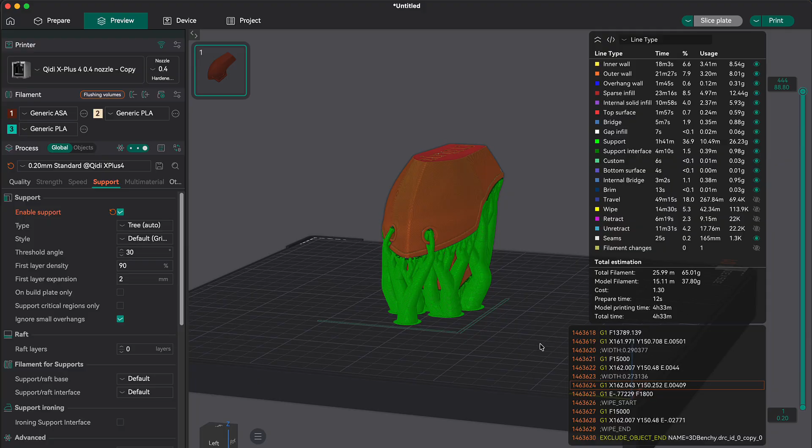If you're new to 3D printing, supports can feel confusing, but the idea is simple. Supports are temporary structures that hold up parts of your model that would otherwise print in midair. Anytime your model has a steep overhang, a floating section, or a complex shape with nothing underneath it, the printer may need support material to keep that area stable.

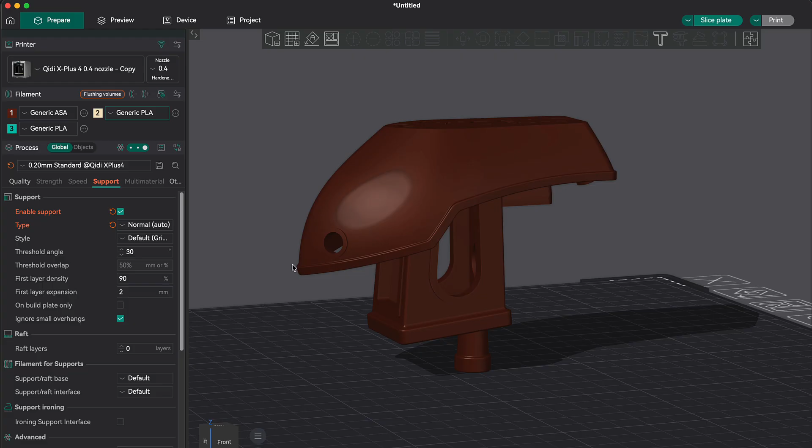In OrcaSlicer, support settings live under Print Settings, then Support. The first big choice is support type. Normal supports create more traditional support structures, often in a grid-like shape. They're stable and useful for broad, flat overhangs.

Tree supports branch upward from the build plate, usually using less material and touching the model in fewer places. For most beginners, auto is the easiest starting point. OrcaSlicer looks at the model and generates supports where it thinks they're needed. Manual is for when you want more control, using painted support areas in the Prepare view.

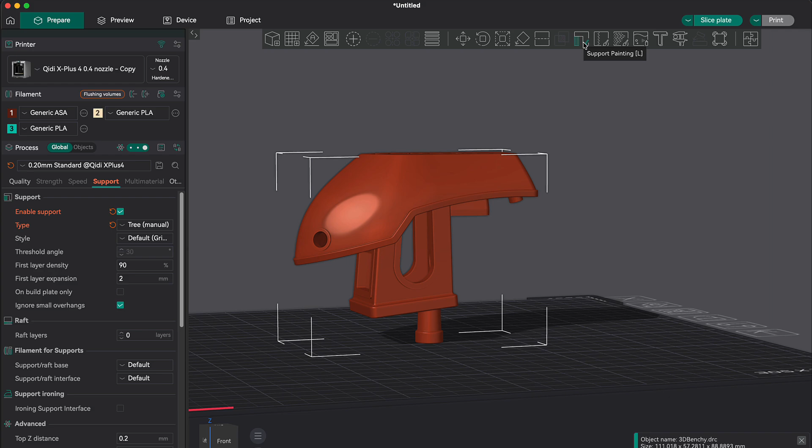Next is support style. Grid is stable and straightforward. Organic is the default style for tree supports and is great when you want efficient branching supports. Tree Slim uses lighter, more delicate branches, while Tree Strong creates more robust branches for heavier or more difficult overhangs. Tree Hybrid is useful when you want tree behavior, but needs something more like normal support under large flat areas.

The most important beginner setting is threshold angle. This tells OrcaSlicer which overhangs should receive support. A lower or higher threshold changes how aggressive support generation is, so always check the preview after changing it.

Not every overhang needs support. Small overhangs, tiny lips, and short bridges may print fine on their own. The Ignore Small Overhang setting helps avoid adding unnecessary support to areas that probably don't need it.

On build plate only is another beginner-friendly option. When enabled, supports only start from the build plate, not from the model itself. This can reduce marks on the print, but it may not support every difficult area.

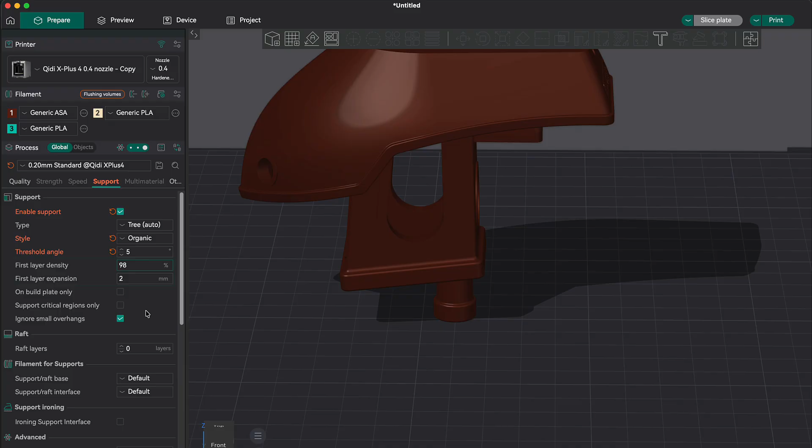First layer density and first layer expansion affect the first support or raft layer. These can help supports stick better to the build plate, especially for tall tree supports or narrow support bases.

The key habit is previewing. After enabling supports, slice the model and inspect where the supports touch, how much material they use, and whether they're protecting the overhangs you care about.

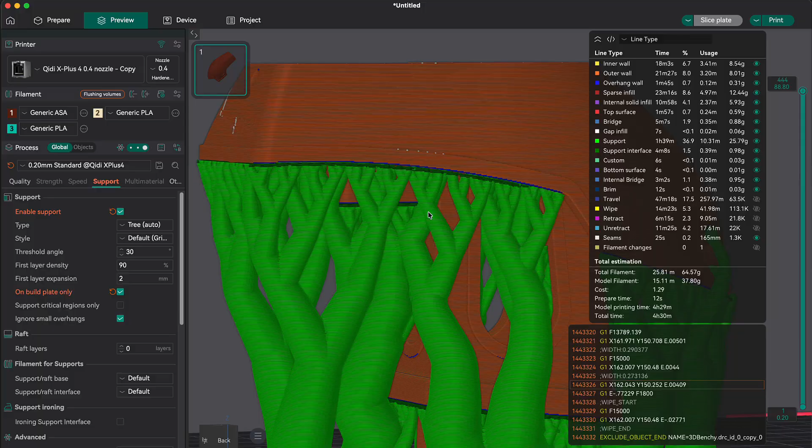More support is not always better. Too much support can waste filament, increase print time, and leave marks. Too little support can cause drooping or failure. The goal is just enough support for a clean print.

For beginners, start with auto supports, try organic. Depending on the model, keep build plate only in mind, and always check the preview before printing. Supports are all about balance: stability while printing, easy removal afterward, and the cleanest surface possible.